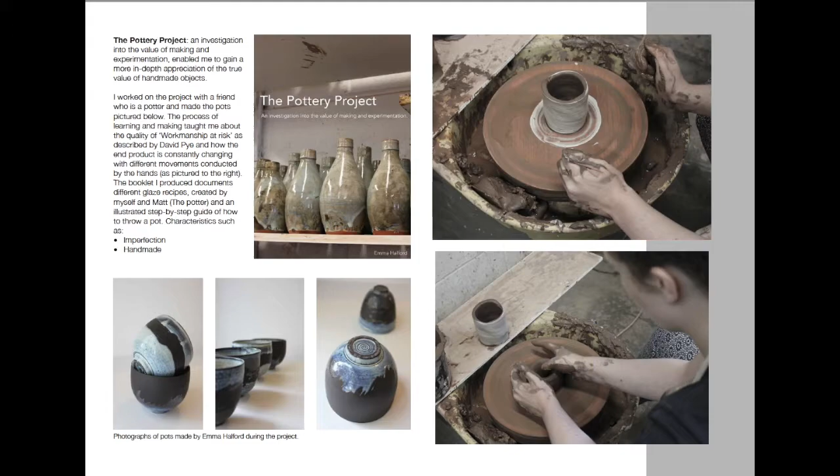A more balanced approach is required. In addition, the pottery project, an investigation into the value of making and experimentation, enabled me to gain a more in-depth appreciation of the true value of handmade objects.

Crumlin sits at the heart of the Cardiff City region, a recent economic development construct comprising of 10 local authorities. Crumlin grew rapidly in the early part of the 20th century once coal owners Partridge and Jones sank a mine on a highly valuable steam coal seam that runs under the town.

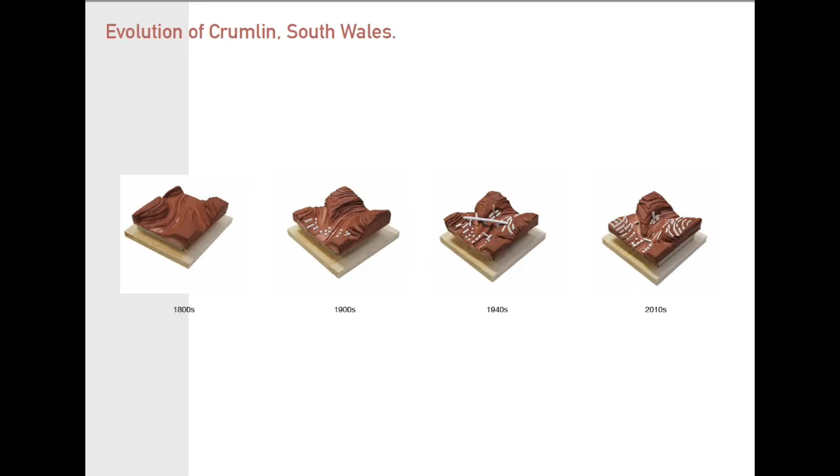It quickly became a centre for high-quality coal and steel, most evident in the construction of the town's historic viaduct, once the largest in the UK.

Partridge and Jones, owners of over 30 mines, designated Crumlin as their flagship site due to the value of the steam coal it produced. Steam coal, when burned, produced clear smoke and therefore enabled naval warships to advance on the enemy undetected, resulting in the naming of the colliery the Navigation.

A byproduct of the coal extraction was high-quality fire clay, causing most collieries to have a brickworks located alongside. Partridge and Jones drew upon this quality local resource in creating their flagship site, with the overall aim of exhibiting their considerable status, confidence and ambition in the area.

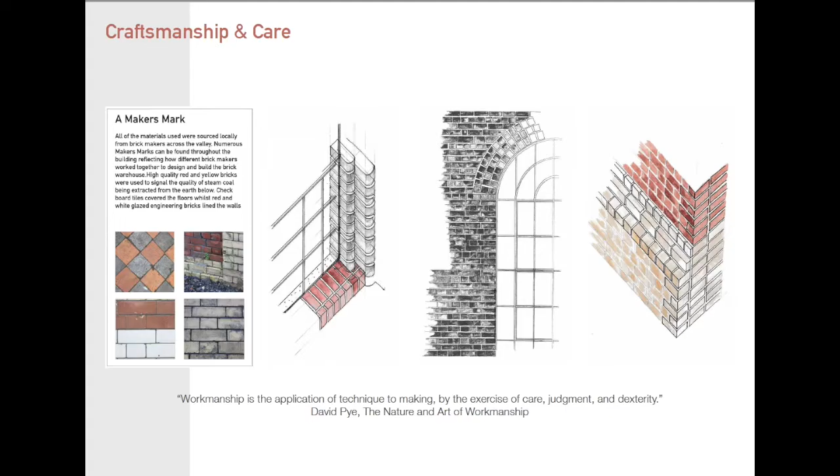The care and craftsmanship evident in details of the buildings elevated the Navigation Colliery above other collieries, resulting in their listing. It is clear that from the outset it was meant to be more than just another workplace. Today it is regarded by many as one of the best remaining examples of Victorian industrial architecture. Yet, despite its quality, it finds itself on the list of the UK's 10 most endangered historical buildings.

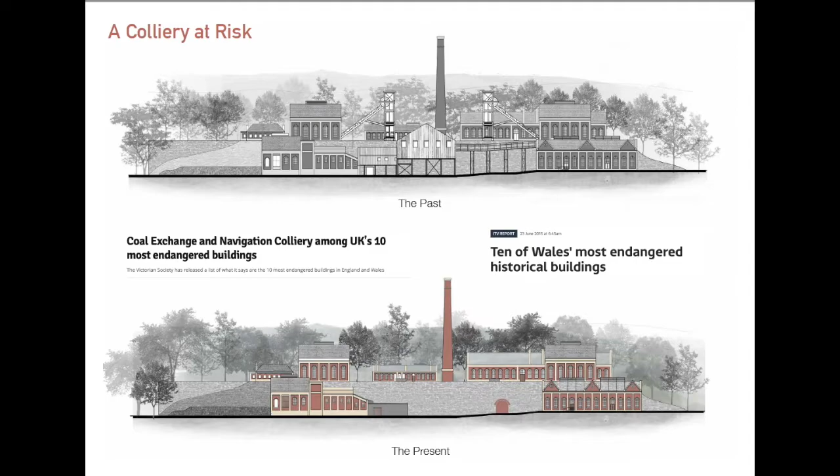Shortly after the pits opened, miners decided to pool resources to create an institute. Like the Sustainable Studio, the aim was to create a common place to learn, share and exchange ideas. It still serves that function today.

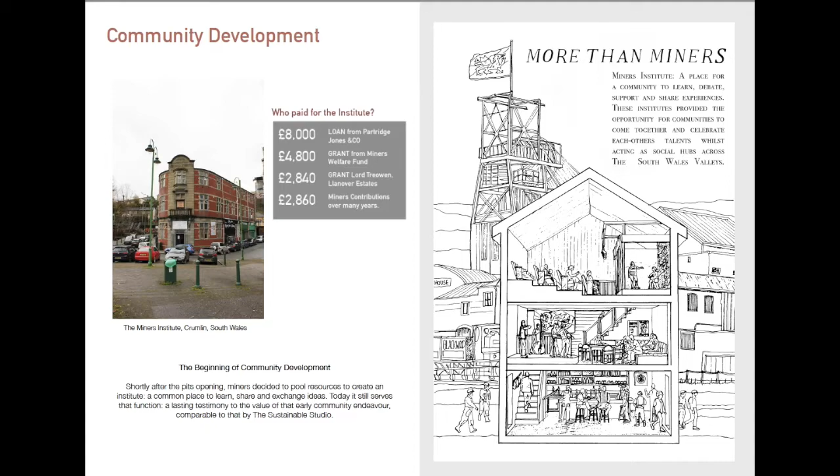The Navigation closed in 1967 and has since stood vacant. In recent years, management of the site transferred to a local community group, the Friends of the Navigation, that is trying to bring the buildings back into use.

For many decades, Wales's regional development policy has focused employment-related investment within the heads of the valleys and M4 transport corridors. Over time, this has reduced many mid-valley towns to little more than dormitory suburbs.

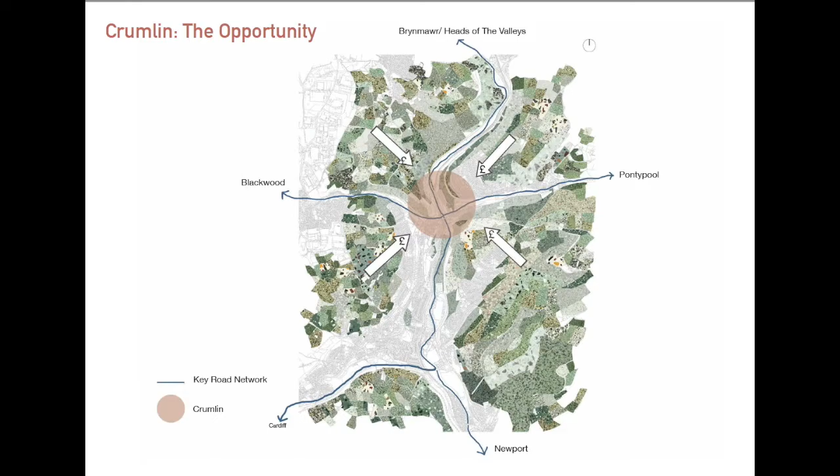However, things are changing. The latest regional initiative, the new Cardiff City Region Partnership, requires investment to be spread throughout the region and not solely to favour Cardiff and Newport. In the context of the Wellbeing of Future Generations Act, any proposed investment should also now consider the balance of social, economic and environmental value.

Crumlin sits at a strategic cross-valleys junction within the South Wales Valleys, making it a suitable location for a multi-nodal transport hub from which the South Wales Metro can operate.

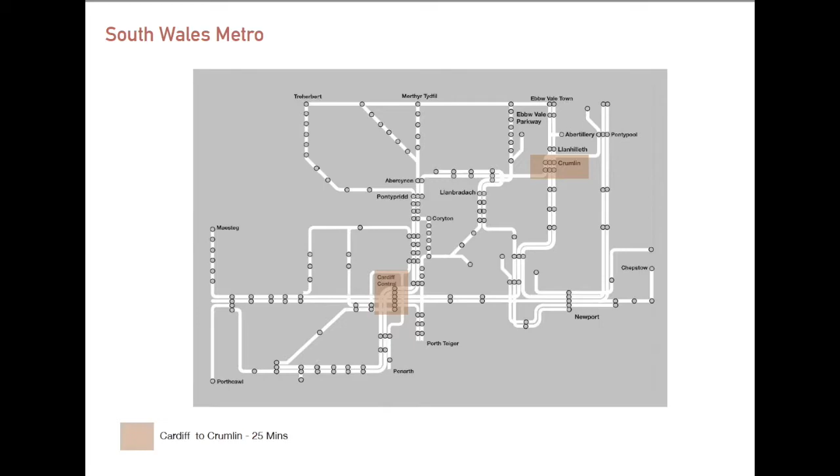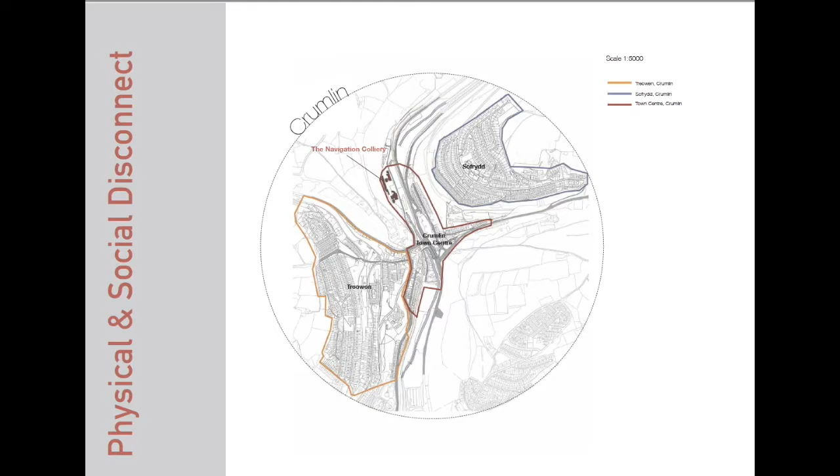It comprises of two residential communities, Sofrydd and Treowen. Originally mining communities, they would have interacted in the town centre, however they have never been connected due to the steep topography of the valley. This has meant that over time they have developed independent characters with a strong rivalry, especially between rugby teams.

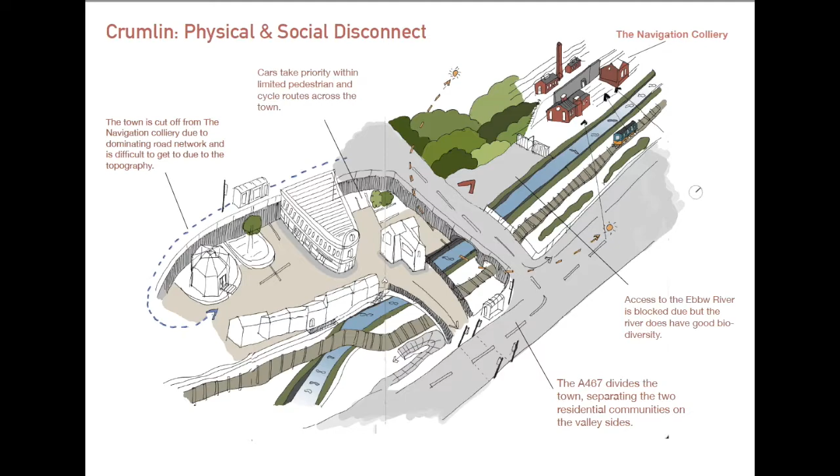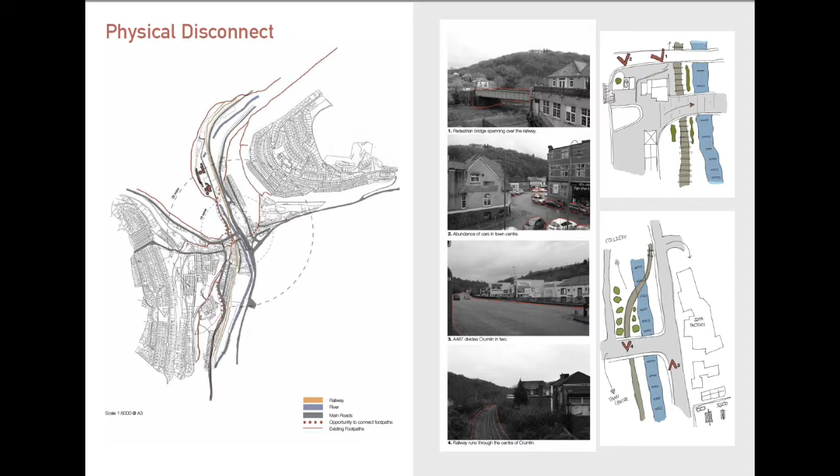Today, residents would rather drive out of town to easily accessible amenities rather than support local businesses. In addition, unlit pedestrian routes and hard barriers prevent a clear route through the town. When interviewed, Crumlin residents expressed concern about the lack of safe public spaces, local employment opportunities and limited community facilities.

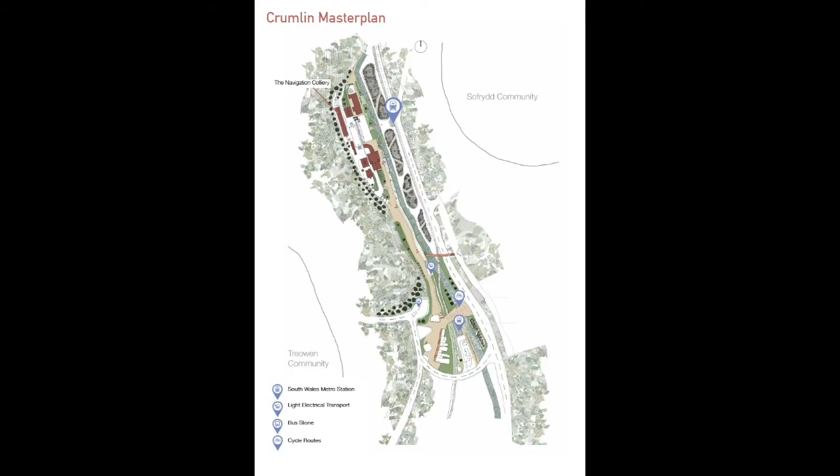My approach seeks to open up the centre of Crumlin, create safe pedestrian routes and to reconnect the Navigation with the town. The proposed metro hub is located in the centre of the town and the harnessing of renewable energy sources, such as mine water, will help move Crumlin towards a carbon-neutral future.

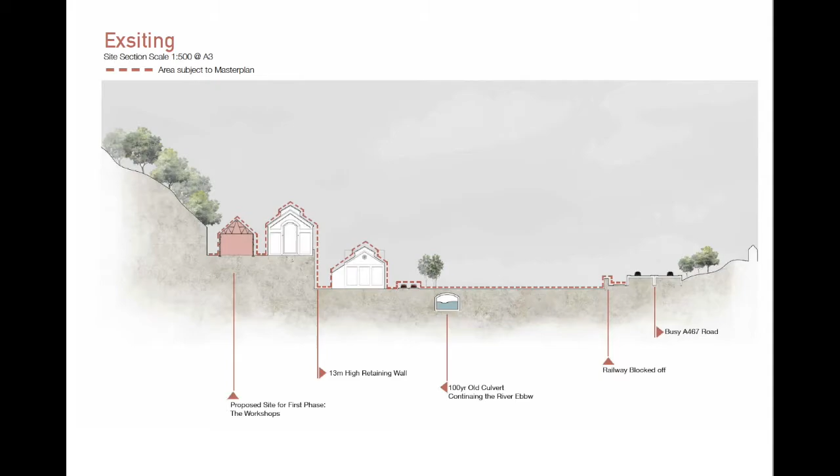The River Ebbw is currently contained within a 100-year-old culvert running underneath the site, and the current railway line to Cardiff runs across the site but is blocked off. The dotted line shows the area that I've considered when master planning.

My proposals open up the River Ebbw for leisure and wellbeing activities whilst using the river water to create a biodiverse wetlands area that will provide much needed safe leisure opportunities. The introduction of a pedestrian metro stop will also bring visitors and workers to the site directly and encourage active travel routes.

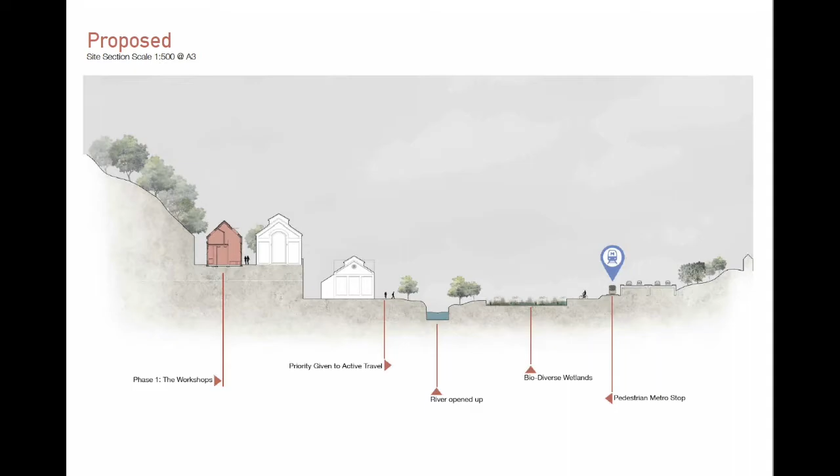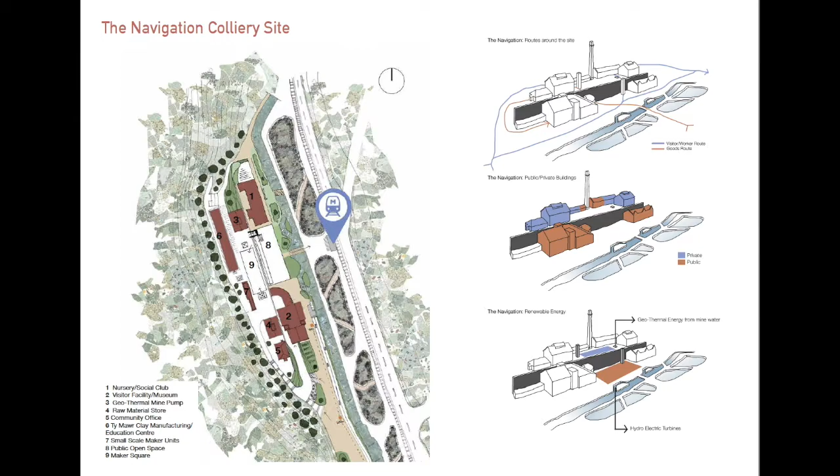The colliery site will celebrate the site's and indeed Wales's historical association with the extraction of coal and clay through the creation of an innovative manufacturing facility which will provide local jobs. It is proposed that a community development model will help to balance economic and social activities across the site and allow revenue streams derived from the project to support the wider regeneration of the area.

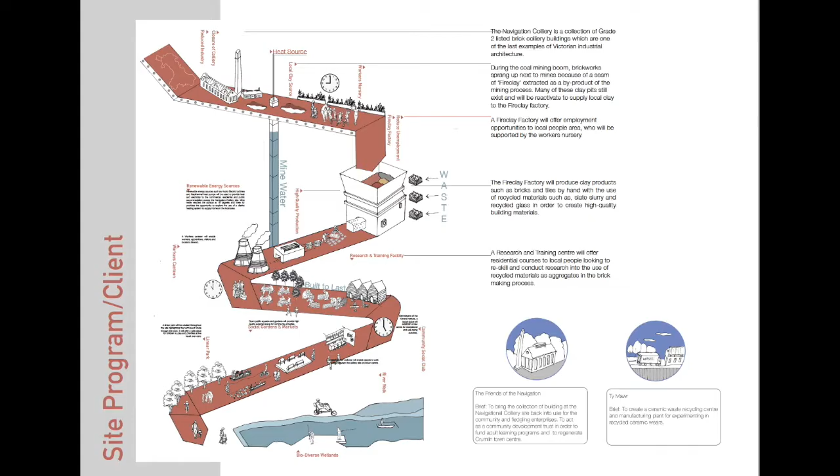The diagram shows the programme proposed for each building and which activities produce a revenue stream which can be reinvested. I have identified a potential client for the first phase of the development, Ty Mawr Manufacturing, an organisation that produces innovative natural lime products. The overarching objectives guiding redevelopment of the navigation are to enable learning, sharing and exchange of ideas between experts, visitors and local people.

Phase 1 will create an innovation and education centre for producing handmade fire clay products unique to the South Wales coalfield. Incorporation of recycled aggregates such as crushed tiles and glass will allow subtle manipulation of the final product's thermal and structural properties. The facility's kiln will be wood-fired, both for sustainable reasons and because wood ash can be used to glaze products in a way that is truly unique and bespoke.

Crumlin clay products will be used in both the restoration of the workshops and the regeneration of the wider site and town. The products will create moments of quality along the connecting route between the colliery and the town centre, visually and symbolically reconnecting them.

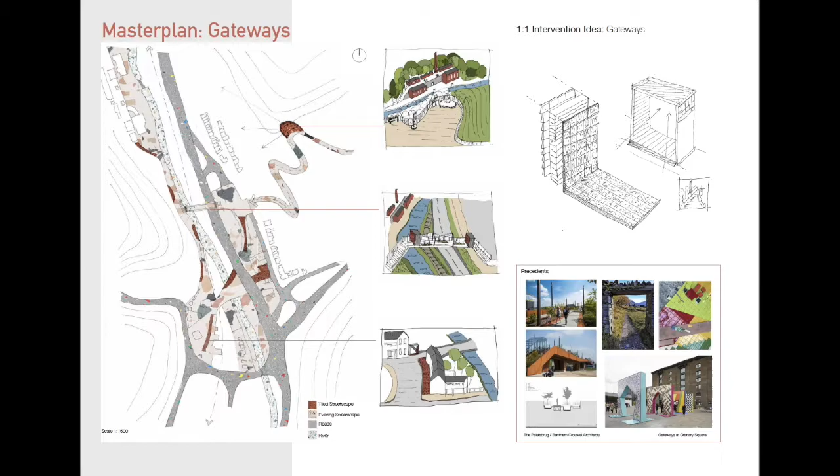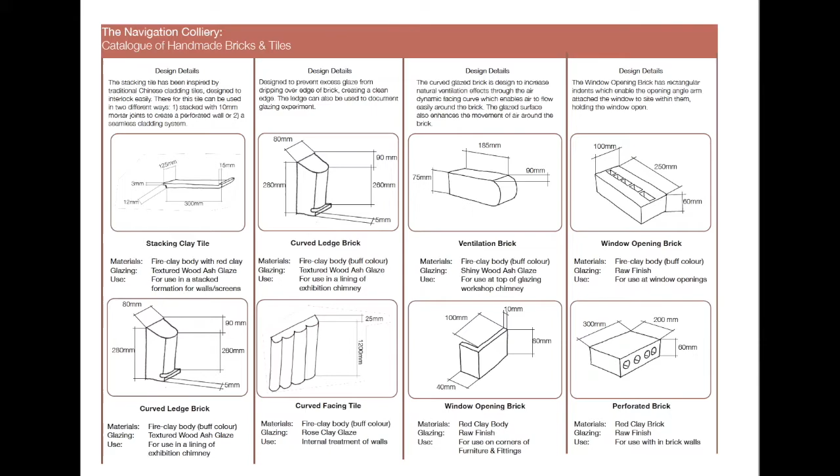Reflecting the brick tiles of the Victorian era, Crumlin clay products' range of clay bricks and tiles will be carefully detailed. This sample page provides an illustration of the kind of bricks and tiles designed to create quality, bespoke moments within the restored building.

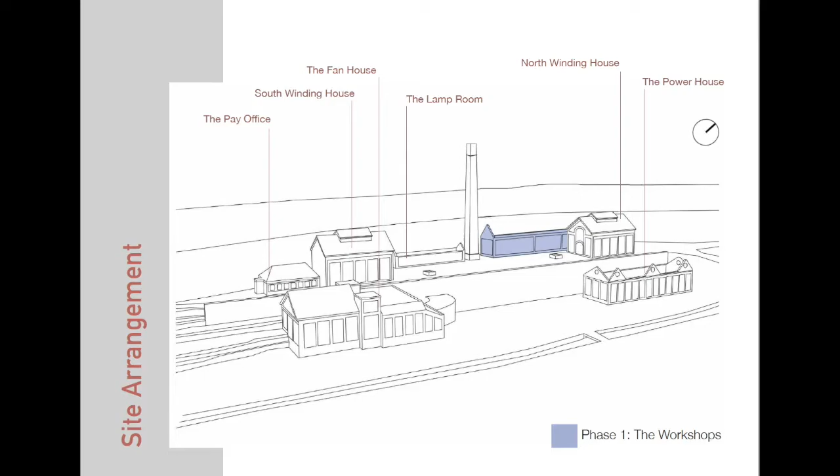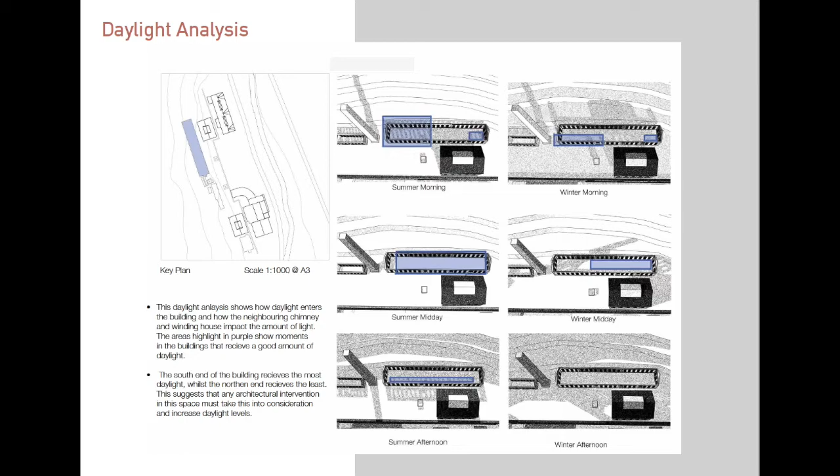Phase 1 focuses upon the workshops located on the site's upper level and partly concealed by adjacent buildings. Despite being open to the elements, the solid masonry structure remains in generally sound condition. However, its close proximity to adjacent buildings and retaining wall prevent natural light from entering the deepest parts of the plan. Three chimney structures divide the existing warehouse, each with a specific function.

The permanent exhibition chimney reflects daylight into the space below and shares the making story of wood-fired ash-glazed bricks. The wood-fired kiln is at the heart of the building and provides heat to fire bricks, but also for the building services through the exchange of waste heat to water.

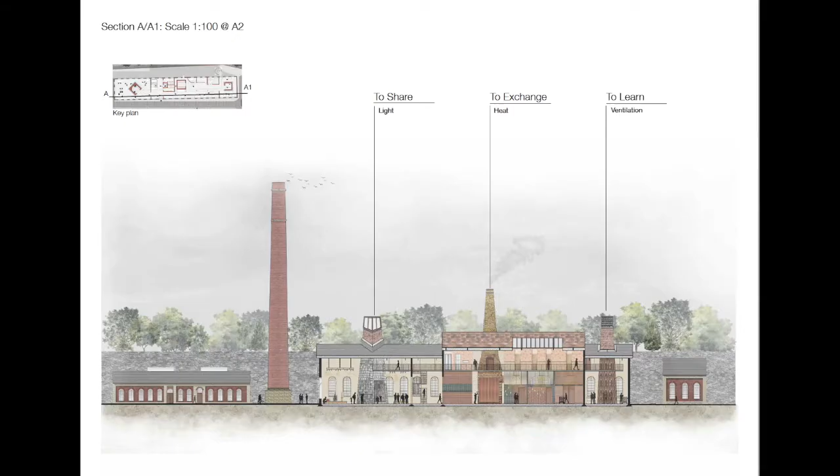The kiln facilitates the making of small batch runs of bespoke bricks and tiles in the adjacent workshop area. The third chimney is central to the glazing workshop, a smaller space that can be divided to enable the running of specific courses in glazing. Spanning between the chimneys is a gallery walkway providing views through the building.

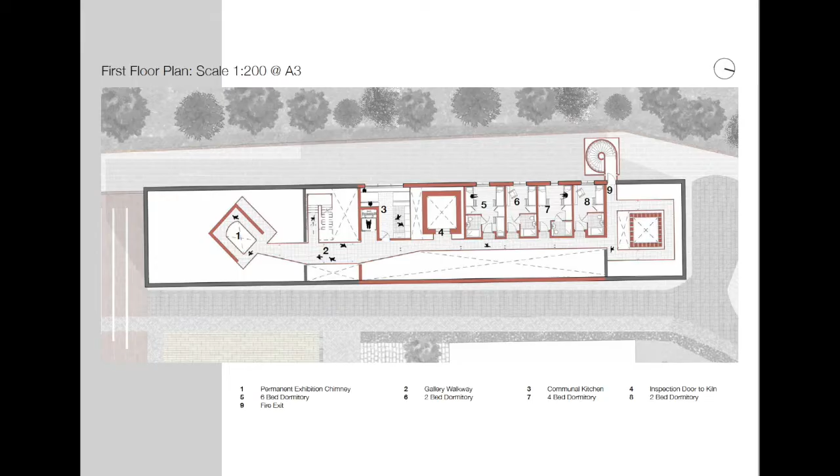The first floor houses a communal kitchen area and multiple dormitory rooms, each designed to be characterfully different. The building faces onto a maker courtyard where seasonal events are framed by the ground surface textures, and neighbouring buildings house small-scale makers. This drawing shows the separate building components and highlights new from existing structural elements.

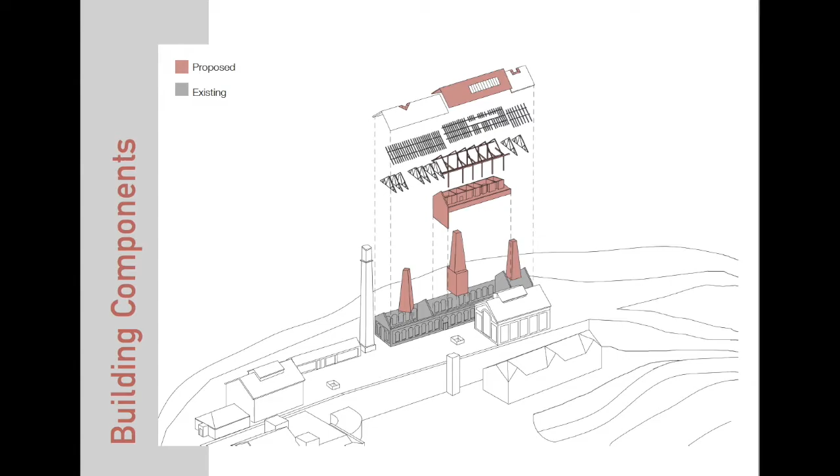My design reflects the original in having an elevated central section. The chimney structures have been respectfully inserted between existing trusses, and the proposed vertical extension is supported by a visually different portal steel frame system that transfers loads through columns to the ground, thereby minimising loads on the existing structure.

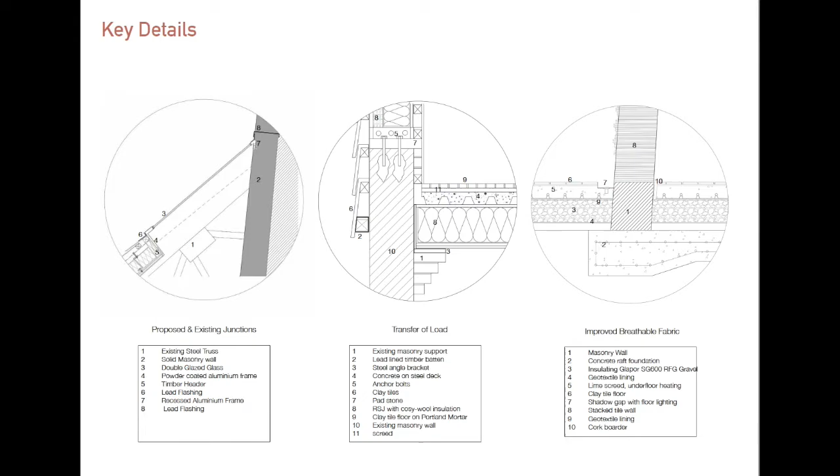Junctions have been designed to enable visual differentiation between old and new, and components such as existing floors and roofs have been thermally improved in order to improve the overall thermal performance of the building, whilst ensuring the breathability of the existing fabric. At the centre of the sharing experience, the permanent exhibition chimney celebrates the beauty of imperfection.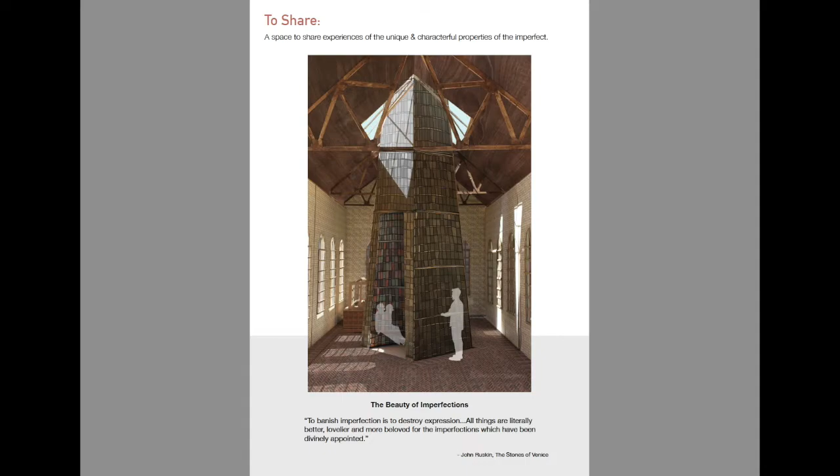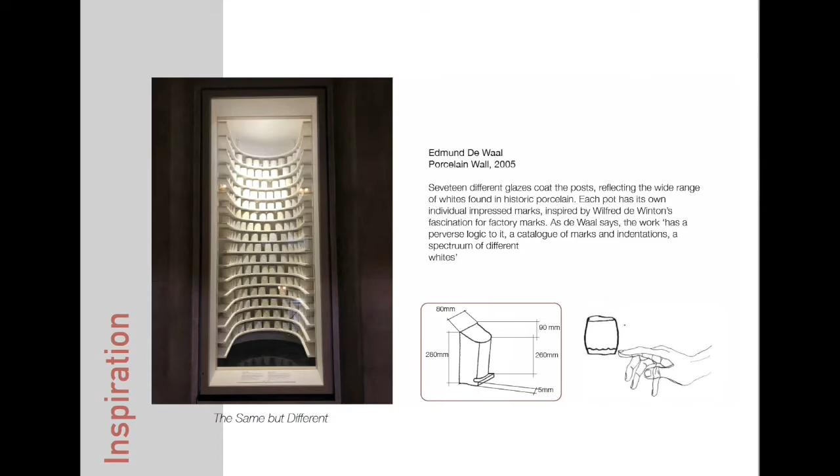Made from on-site handmade elements, it speaks of the making process. My inspiration came from an art installation which showcased handmade ceramic pots, glazed in varying shades of white. The exterior faces feature unglazed bricks of dark ash grey and represent the decades of darkness that the colliery lay dormant.

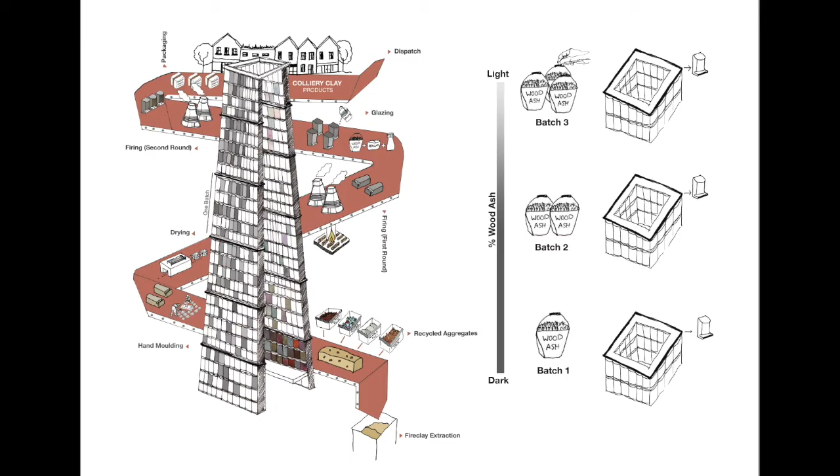Internally, glazed bricks are used and become progressively lighter from bottom to top. The lighter colour is achieved by increasing the percentage of wood ash in the glazing recipe. Each brick batch is differentiated by horizontal profile bricks. Importantly, each brick is characterfully different.

The glazing chimney is created through stacking of a single bespoke clay tile. The creation of these tiles will be left in the hands of craftsmen who will apply their expert knowledge, in turn greatly influencing the final result.

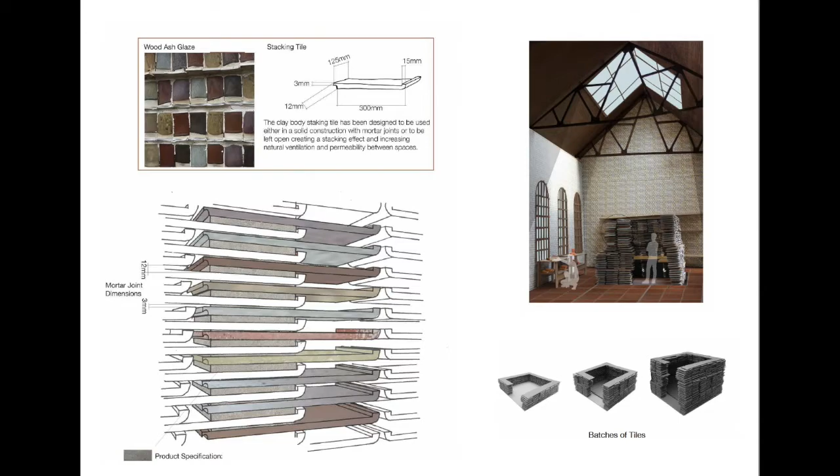Learning is central to the purpose of the glazing workshop. The permeable nature of the stacked tile wall enables effective natural ventilation of the space, creating a comfortable and inclusive learning environment. The wood-fired kiln is the heart of the workshop.

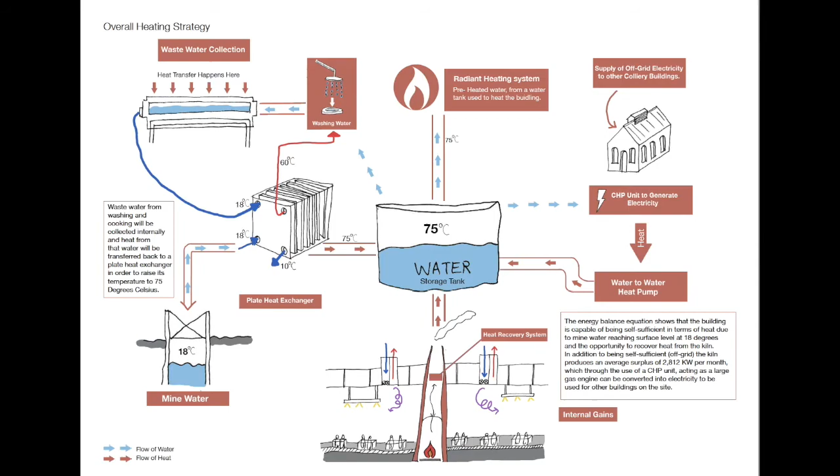Producing 1200 degrees Celsius, it not only transforms raw materials into finished products, but its surplus energy will also be used to heat the workshop and surrounding buildings.

My thesis reimagines Crumlin as a prosperous and fulfilling town in which future generations can live and work successfully. Central to this objective is the need to rebalance the site's economic contribution with environmental and social goals.

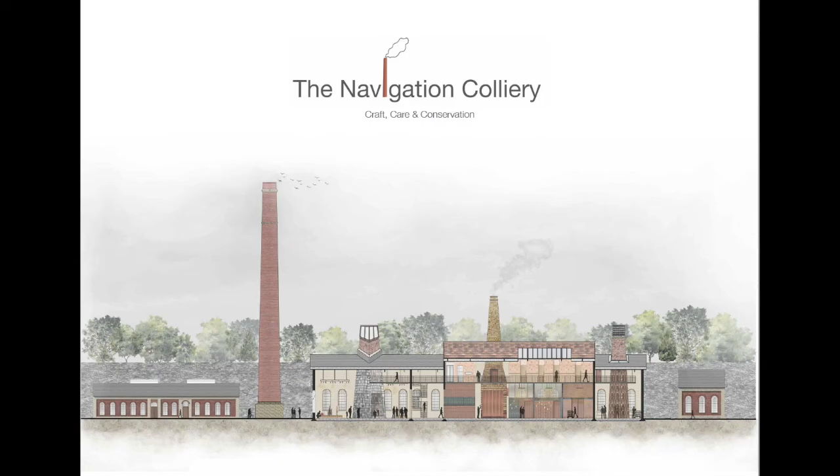Carefully crafted conservation of the Navigation Colliery will provide local employment opportunities and re-establish Crumlin's core identity as a centre for high-quality manufacturing, just as it was 100 years ago.